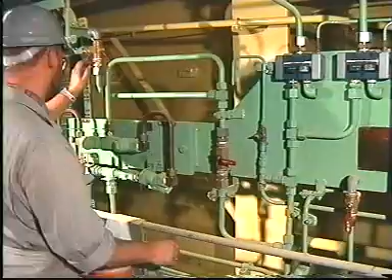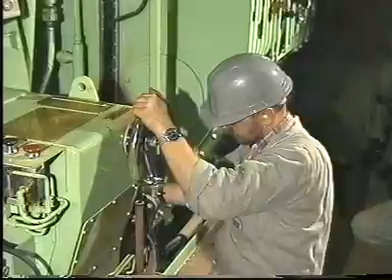Supply 7 bar control air pressure to the pneumatic components on the engine side console. Switch control from the engine room to the engine side console. Turn the regulating hand wheel until the tapered slots of the two levers are aligned.

The throttle non-return valve must be fully open before adjusting the VIT system. Loosen the lock nut and screw the spindle counterclockwise as far as it will go.

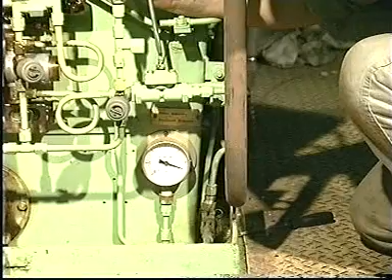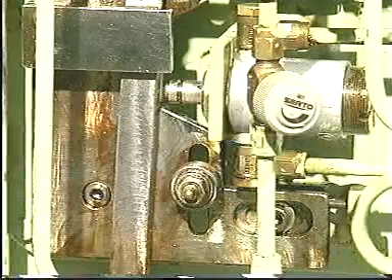Make sure that the pressurized air reaches the VIT actuator. It may be necessary to switch the changeover valve manually. The pilot valve must be adjusted so that when the spindle is pressed 8 mm inwards, the control air pressure will be 5.5 bar.

Turn the regulating hand wheel so that the steel bar just touches the pilot valve. Insert a distance piece with a thickness of precisely 8 mm.

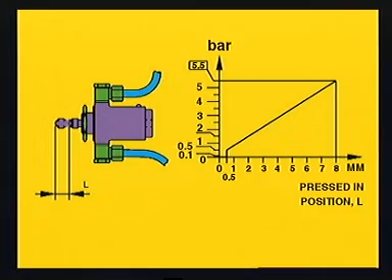If the control air pressure deviates from 5.5 bar, loosen the lock screw and turn the spring retainer cap of the pilot valve until the pressure, which can be read on the pressure gauge on the engine side control console, reads 5.5 bar.

Note that it will not be possible to obtain the correct pressure if the throttle non-return valve is not fully open.

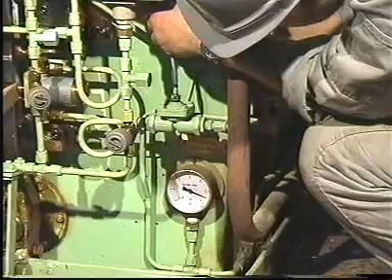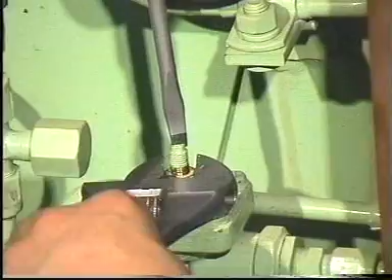Screw the spindle clockwise until a pressure drop can just be registered. Screw the spindle counterclockwise 1 revolution and lock it in this position with a lock nut. This position prevents a sudden increase in VIT index and thereby a sudden increase in the maximum combustion pressure.

Make sure that the VIT index is set at 0. Measure distance R between the two pivoting points.

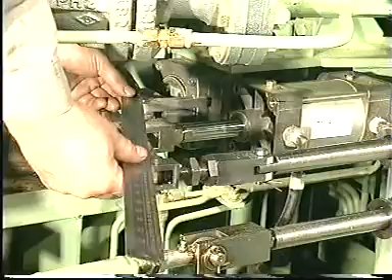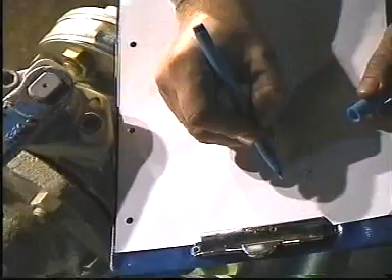Note down the result. Measure distance L between the pivoting point and the center line of the VIT rack. Note down the result.

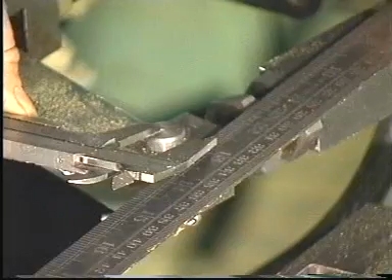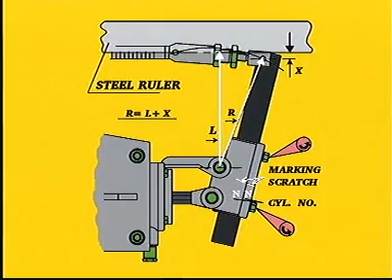Measure distance X between the pivoting point and the center line of the VIT rack. Note down the result. To ensure that the movement of the link is evenly distributed around the center line of the VIT rack, R must equal L plus X.

In the event that R does not equal L plus X, displace the lever until new measurements confirm that R equals L plus X.

When the correct position is obtained, mark the position of the lever and stamp the cylinder number on the locking plate and lever.

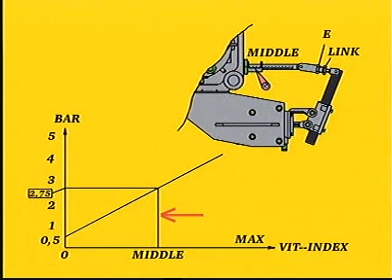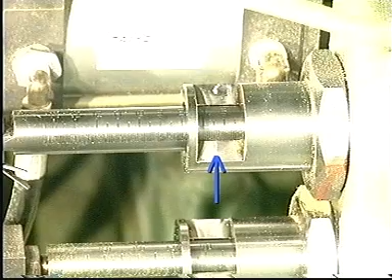Turn the regulating hand wheel until the pressure on the pressure gauge reads 2.75 bar. The VIT rack must be adjusted so that the middle index of the VIT rack can be read when a control air pressure of 2.75 bar is applied. If the actual VIT index does not correspond to the middle index, adjust the link until it does.

Start the engine and run it up to a load corresponding to the breakpoint load. Use the indicator drive or PMI system to adjust the load until it corresponds to the breakpoint load.

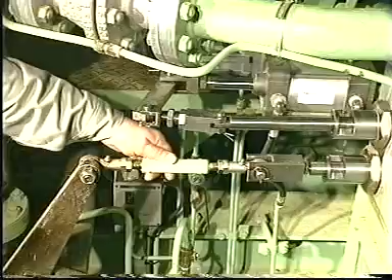The mean indicated pressures of the individual cylinders must not deviate more than 0.5 bar. If the deviation is more than 0.5 bar, adjust the load distribution on the fuel index rack of the individual cylinders. The engine is now running at the breakpoint.

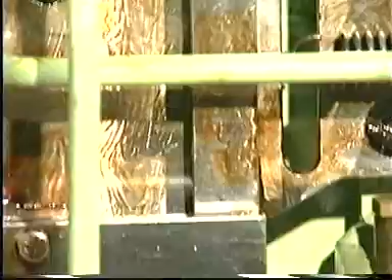At this load, the steel rod must touch both pivoting points. If the rod does not touch both pivoting points, adjust the rod in accordance with step 2.3 of this film.

Measure the maximum combustion pressures of each cylinder. Adjust the links or disconnect and lock the VIT racks so that the maximum combustion pressures, corrected to ISO ambient conditions, are uniform and have the required values.

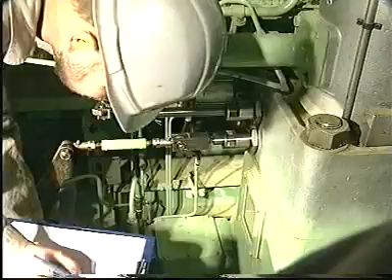Note down the fuel pump indexes and VIT indexes. Run the engine up until it corresponds to 100% MCR. Use the indicator drive or PMI system to adjust the load so that it corresponds to 100% MCR.

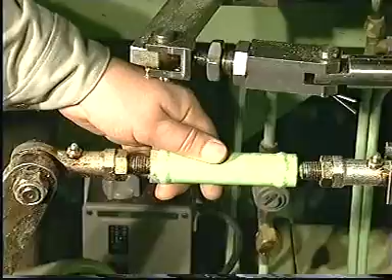The mean indicated pressures of the individual cylinders must not deviate more than 0.5 bar. If the deviation is more than 0.5 bar, adjust the load distribution on the fuel index rack of the individual cylinders.

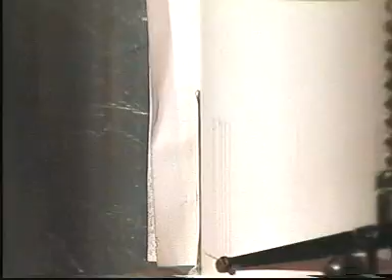Again, measure the maximum combustion pressures for each cylinder. Adjust the links or displace and lock the VIT racks so that the maximum combustion pressures, corrected to ISO ambient conditions, are uniform and have the required values.

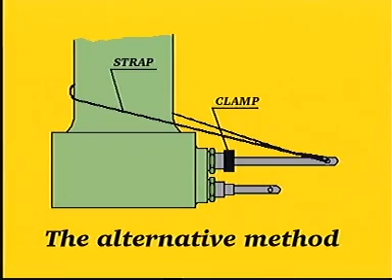Note down the fuel pump and VIT indexes. Note down the VIT indexes at breakpoint and 100% MCR and calculate the average index.

Determine the middle value of the VIT rack and calculate the difference between the middle index and the calculated average index. The result of this calculation will determine how much the cams are to be turned.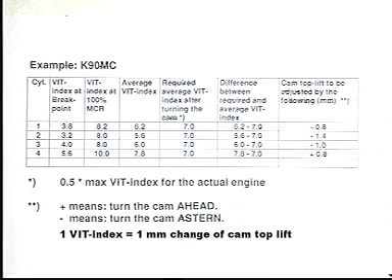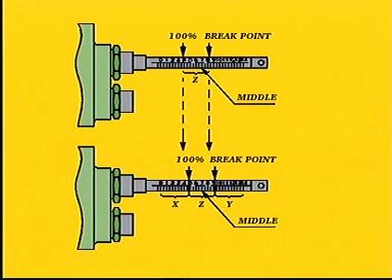If the result exceeds 0.5 millimeters, the cams must be turned according to step 1.6 of this film, after step 1.5 has been completed. The purpose of turning the cams is to distribute the breakpoint and 100% MCR service points evenly around the middle value of the VIT rack.

Note down the VIT indexes at breakpoint and at 100% MCR and calculate the difference. Add half of this difference to the middle value of the VIT rack. Subtract half of this difference from the middle value of the VIT rack.

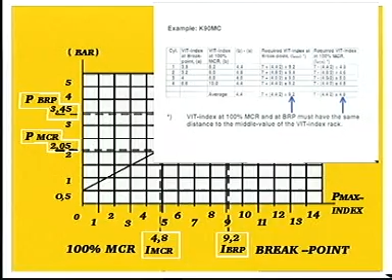Calculate the average VIT index at breakpoint and at 100% MCR. Determine the control air pressures corresponding to the average VIT index at breakpoint and at 100% MCR.

Stop the engine before making any adjustments. Make sure that control air is able to pass the changeover valve. Supply a control air pressure of 7 bar to the pilot valve.

If the links were adjusted in step 1.4, then adjust again so that a control air pressure of 2.75 bar corresponds to the middle value of the VIT rack.

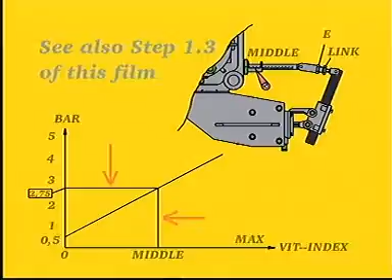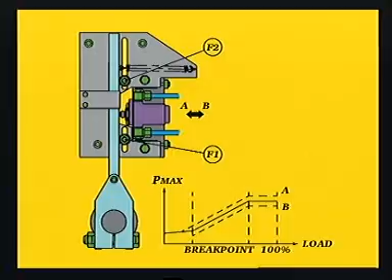Turn the fuel regulating handle to the breakpoint position. At this position, the steel rod touches both pivoting points. Displace the pilot valve bracket until the calculated control air pressure at breakpoint is obtained.

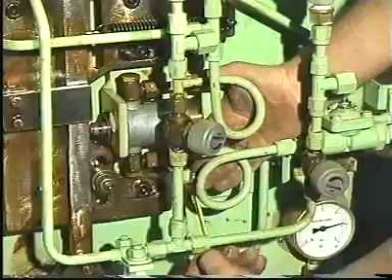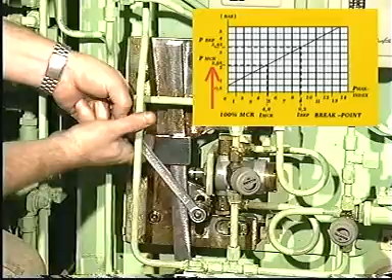Turn the fuel regulating handle to the 100% MCR position. Displace the lowermost pivoting point until the calculated control air pressure at 100% MCR is obtained. Start the engine and run it up to a load corresponding to the breakpoint.

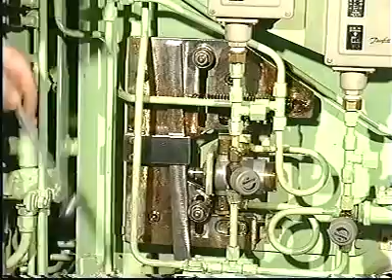Make sure that the control air pressure is able to pass the changeover valve. Fine adjust the links so that the maximum combustion pressures, corrected to ISO ambient conditions, are uniform and have the required value. Load the engine until it corresponds to 100% MCR and fine adjust the lowermost pivoting point so that the maximum combustion pressures, corrected to ISO ambient conditions, are uniform and have the required values.

Cams must be turned if the value calculated in step 1.4 of this film is exceeded.

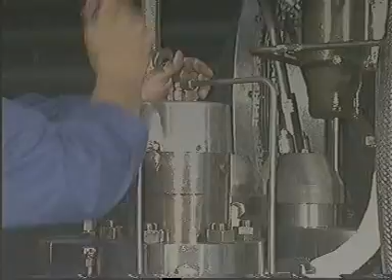The actual fuel pump lead must be determined before turning the cams. Make sure that the reversing links are in the ahead position. Disconnect the air pipe and remove the cover from the puncture valve.

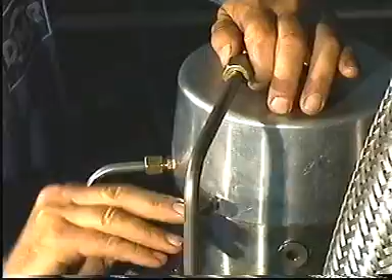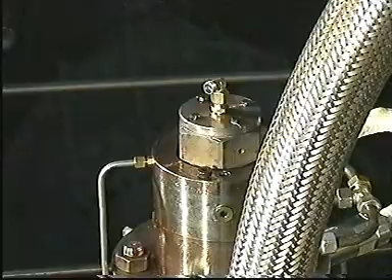Remove the plug screws to provide access for the measuring tool. Remove the puncture valve.

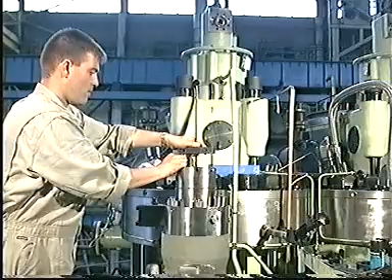Mount the measuring tool, making sure that it engages correctly with the bore in the top of the fuel pump plunger. Turn the cylinder concerned to top dead center.

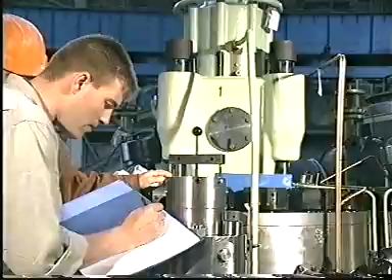Read the actual fuel pump lead directly on the measuring tool. Read the VIT index. If the VIT index is not at 0, the lead must be corrected before it is recorded in the engine logbook.

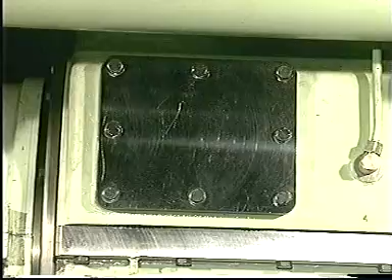Carry out fine adjustments through the small cover. If the camshaft has been dismantled or if new cams have been mounted, adjust the cams before mounting the lower part of the camshaft housing.

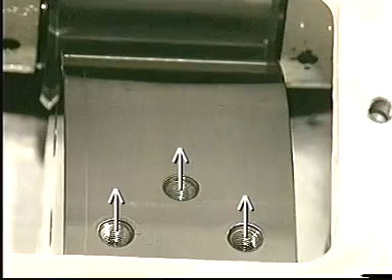Remove the plugs from the cam and insert copper gaskets. Mount, but do not tighten, the snap-on couplings.

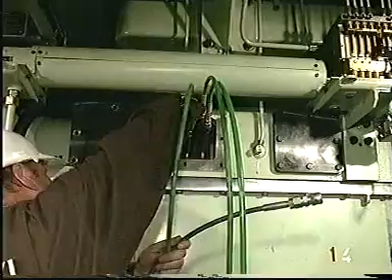Connect the snap-on couplings to the high-pressure pump and vent the system. When oil without air bubbles flows from the couplings, fully tighten the couplings.

Turn the engine until the special spanner can be mounted, then raise the pressure until oil seeps out between the cam and camshaft.

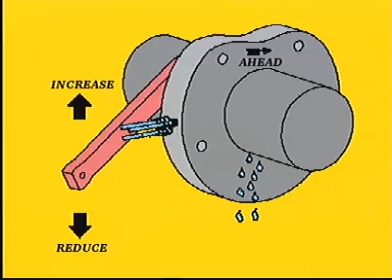Read the measuring tool once again before turning the cam. Turn the cam in the required direction. See also step 1.4 of this film.

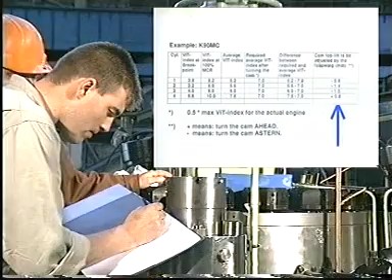Follow the turning of the cam on the measuring tool and stop turning when the required change has been obtained. Relieve the system of pressure and remove the spanner and hydraulic tools.

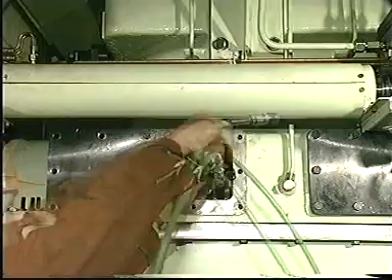Leave the cams to settle for a minimum of 15 minutes and then mount the plugs. Turn the cylinder concerned to top dead center and read the new fuel pump lead.

Read the VIT index. If the VIT index is not at 0, the lead must be corrected before it is recorded in the engine logbook. Mount the cover of the camshaft housing.

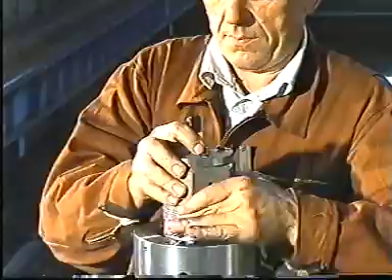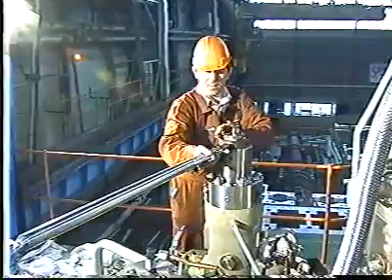Provide the puncture valve with new sealing rings and lubricate with molybdenum disulfide. Tighten the puncture valve to the torque stated in the instruction book, Volume 2, Chapter 909, and mount the plug

screws, cover and control air pipe. Finally, change over to normal engine control. Make sure that the VIT system changeover valve is properly connected.

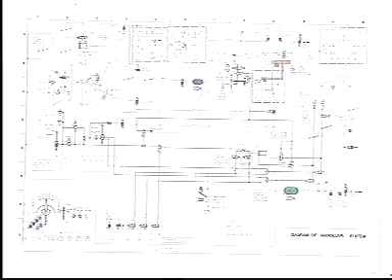The system will have to be adjusted when certain components are replaced. Regarding the throttle non-return valve, see Part 1, Step 1.1 of this film. Regarding the pilot valve, see Part 1, Step 1.1 of this film. Regarding the VIT actuators, see Part 1, Step 1.2 of this film.

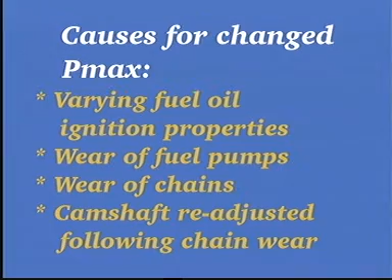Measure the maximum combustion pressures regularly, especially after bunkering new fuel oil. Adjust the individual links until the maximum combustion pressures, corrected to ISO ambient conditions, are uniform and have the required value. If all the maximum combustion pressures are either too high or too low, displace the pilot valve bracket.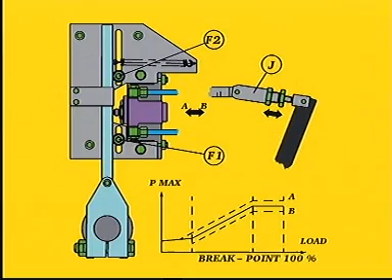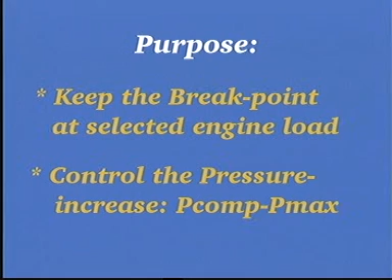The purpose of this adjustment is to keep the breakpoint at the selected engine load and to control the pressure increase. An excessive pressure increase may lead to a poor cylinder condition. In this event, contact the engine builder before making any adjustment.

Start the engine and run it up to a load corresponding to the breakpoint load, and hereafter to 100% MCR load. Use the indicator drive or PMI system to adjust the load so that it corresponds to the breakpoint load and 100% MCR load. Note down the fuel pump indexes.

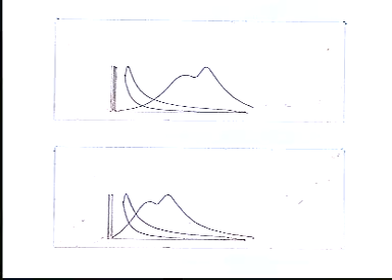The mean indicated pressure of the individual cylinders must not deviate more than 0.5 bar. If the deviation is larger than 0.5 bar, adjust the load distribution on the fuel index rack of the individual cylinders.

Switch from engine room control to control from the engine side console. Turn the fuel regulating hand wheel corresponding to the determined fuel pump index at breakpoint. If the steel rod does not touch both pivoting points, loosen it from the shaft and turn it to the correct position.

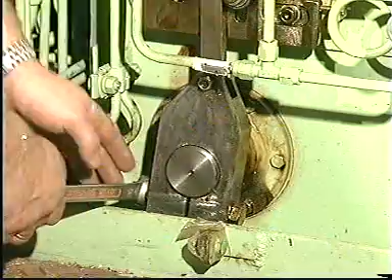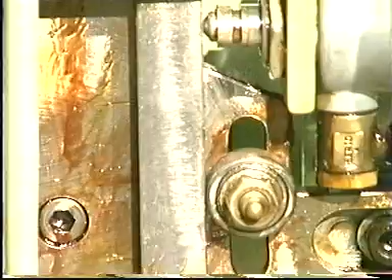Start the engine and run it up to a load corresponding to the breakpoint load. Make sure that the steel rod touches both pivoting points. Adjust the links until all maximum combustion pressures are uniform, and then displace the pilot valve bracket until the average combustion pressure, corrected to ISO ambient conditions, is at the required value.

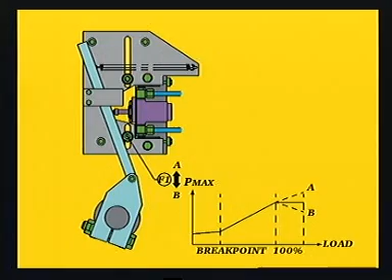Load the engine so that it corresponds to 100% MCR load and displace the lowermost pivoting point until the average combustion pressure, corrected to ISO ambient conditions, is at the required value.

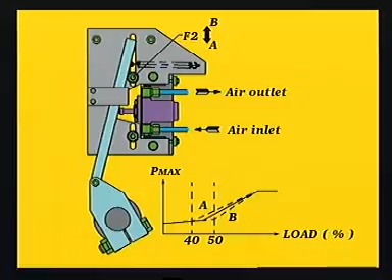Decrease the load until it corresponds to 40 to 50% MCR load and displace the uppermost pivoting point until the VIT racks just start to move inwards.

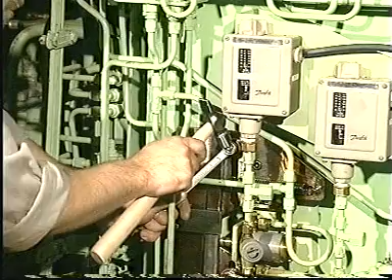This occurs at a control air pressure of about 0.5 bar. Lock the pivoting point in this position and change over to normal engine control.